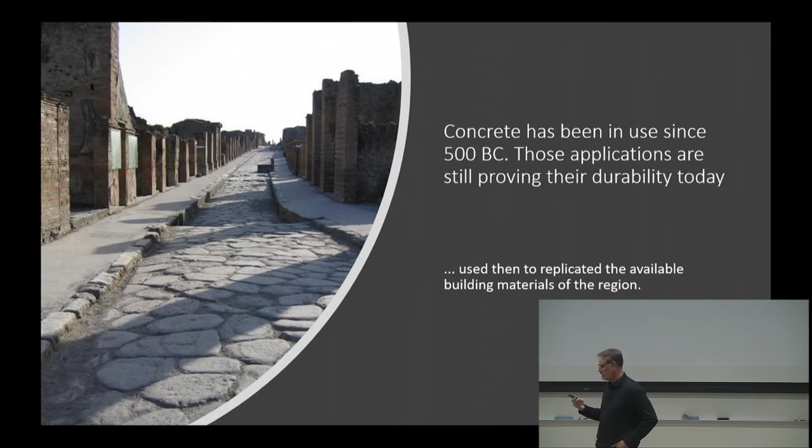Fast forwarding here to today, I publish this magazine called Concrete Decor. It covers all of the architectural and decorative aspects of concrete. There's a diversity of different applications for concrete out there, and a number of different types of people that use concrete for landscaping, pool building, general construction, and a myriad of other applications. But then when you get to a building like the museum, it too has a big concrete surface, both indoors and probably outdoors as well.

But that concrete is your canvas. And it really becomes an exciting opportunity for you guys to delineate space within this project, and you guys can have an incredible amount of fun with it.

So first off, you need to understand that concrete's been around for a while. In fact, they've been using concrete as a finish for a long, long time. It may have been made a little bit different at the time, but today concrete is made with Portland cement, and it proves to be a very durable surface as well. In fact, you can even make it better.

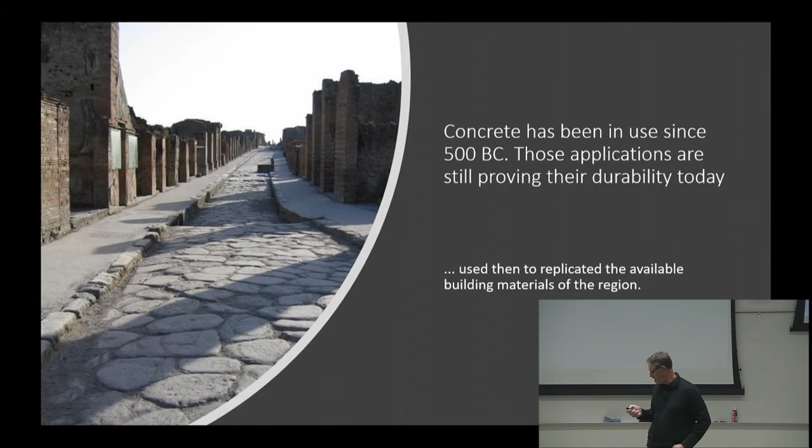So concrete has this ability to create a time and a place for people. Just like this classroom, we could have a bright yellow floor, and it would really wow you when you walked into this space. It also has its subtleties and blends very well with the walls and the types of chairs and the fabric on those chairs and a little bit of wood finish in this room. But it's all very complementing, so it works in a very subtle way in this space for you guys.

What concrete also has the ability to do for you guys is create an incredible entrance, a great foyer. Before you step into this classroom, you are walking into a space that is conditioning your mind, your creative thinking. It's really getting you excited about where you are and where you're about to be.

So concrete, in Las Vegas of all places, a place I just came home from, is probably the expose of all things decorative in concrete. So just for instance, with a building such as the Stratosphere, the entrance to that building includes concrete that's been stamped. It's been colored in a red to kind of mirror the Red Rock Canyon that is outlying to the Vegas area. But all of these things kind of touch on the geography and the things that get you kind of into a new and exciting space. So concrete has this incredible ability to do that for us.

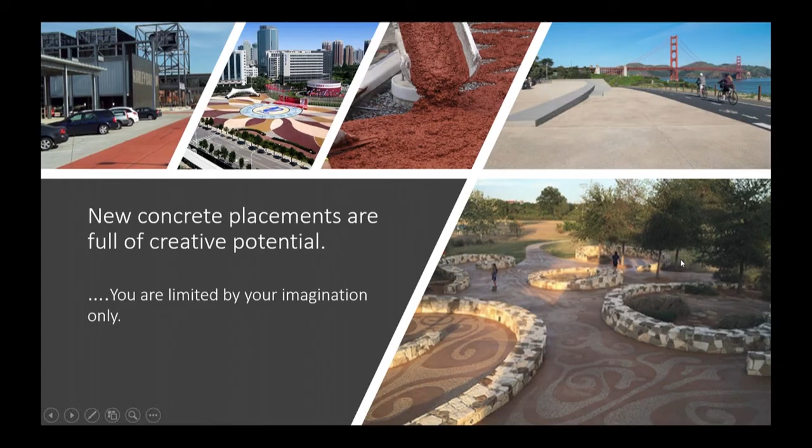So the next is about what you can do with existing concrete. This type of substrate that you're standing on in this room here can be saw cut into 3-foot squares, and you could backfill those saw cuts with a tile grout in white or black, and suddenly this whole room and the appearance of this space changes dramatically, but it's because you're doing something with the existing concrete surface.

There are a number of products out there for overlaying or putting down a topping on concrete that is stampable, that makes it look like natural stone, or it can be a self-leveling product that is hiding imperfections, bonding extremely well to the substrate, and giving you a completely new canvas to work on. A surface that will accept color just like the concrete does, but with more control over color as well.

Oh, there we go again.

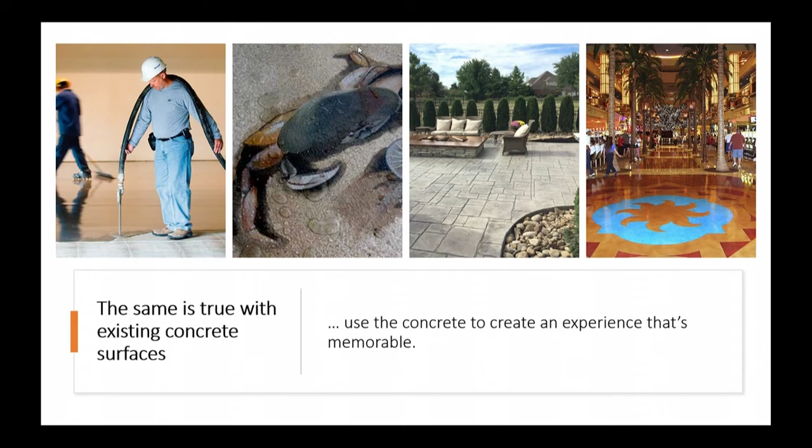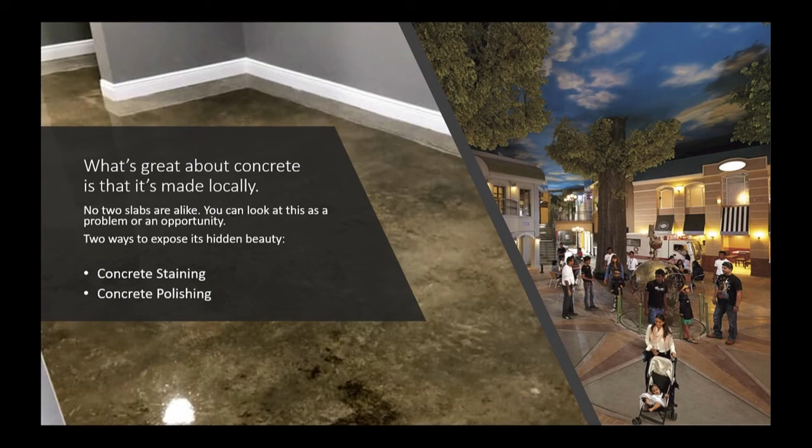What's really important to know about concrete is that even though it's the most used building material in the world, it contributes about 10% of all output of carbon. It's just not going to go away. The world's got to live with the fact that this building material is the most durable, the longest lasting, most sustainable building material on the face of Earth. So we're going to look for ways to protect concrete and the production of that material, while also looking for ways to improve our footprint as well.

There's a lot of substitutes that go into concrete that can replace some of the cement that is manufactured elsewhere. But for the most part, you're working with a product that was made locally, using natural resources, aggregate that was mined in local quarries to make that slab. Not too much of that product was imported from other places. So unlike another type of manufactured product that has to be manufactured, shipped to a supply store, then shipped to the plant or project site so the project can be finished, concrete is a material that is standing there ready to be finished for you.

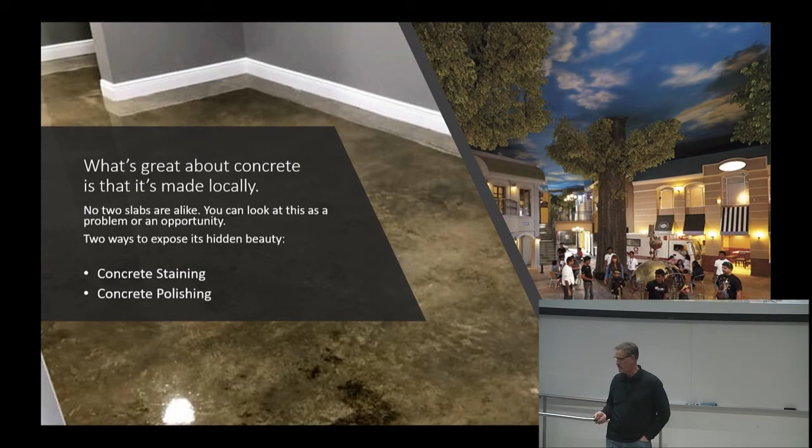So when I was looking at this project, I thought about a couple of different types of materials that would probably go well with this building. I'm just going to let you guys think about those things as you put your projects together.

Stains are one of them, and there are three different types of stains used in concrete. One is reactive stains. They react with the lime in concrete, and that creates a reaction. Every time it's going to be in an earth tone, so it's going to be subtle colors - browns, light greens, reds, terracottas - but always in that earth tone.

Acrylic stains are going to be a more vibrant color. You can get pastels and a number of different, real popping colors on concrete. Reactive stains react with the concrete; acrylics stay on top of the concrete. So you have to address those types of products in different ways.

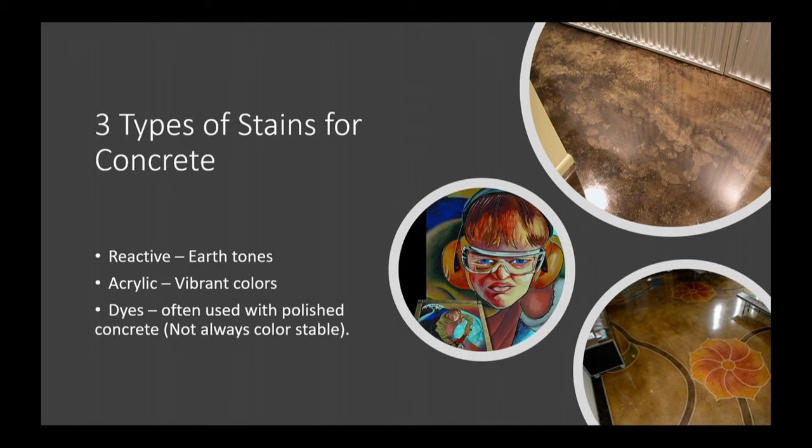Dyes become the other coloring option, but that really takes me to the next recommendation, which is polished concrete - and that's exactly what you're looking at on your floors in this room here. You're not just looking at a concrete slab that has been honed or brought up to a level of gloss that you might find in some other type of establishment where they want better light refractivity, a higher gloss level. So the polished concrete is a good thing because it also improves the strength of the concrete.

Chemicals that are used, like silicates or magnesium, actually react with the lime in concrete and create a harder surface. So you have more abrasion resistance, higher PSI - all of these things add to the durability of that slab. It's already been sitting there since 1940. So it's a process that leads to a very low maintenance surface as well.

That's all that needs to be done in here is somebody coming in after hours and putting a mop or a dust mop on the floor and cleaning up. Maybe every 6 months they come in and do something else to the carpet or to this concrete floor in your classroom.

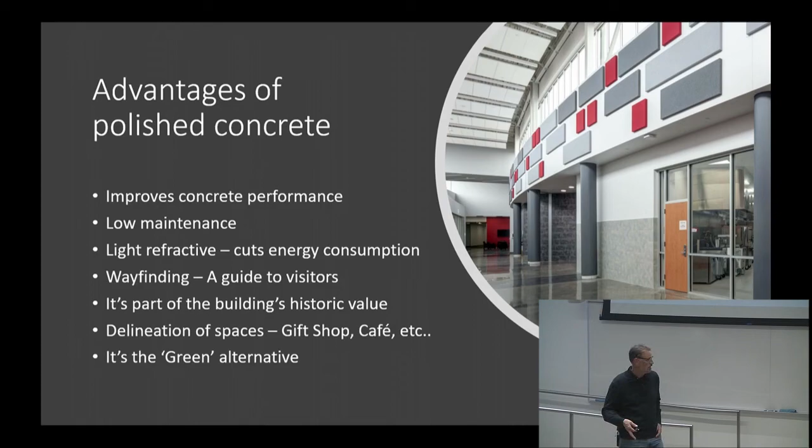Light refractivity is a big plus in this category too, where you're talking about 300,000 square feet of surface area inside this building covered by a roof, a rather dark overhead area. It could have a tendency to use a lot of electricity to get that area up to a level where people can actually see where they're walking. So light refractivity cuts energy consumption.

Concrete, the way you guys plan to use it, can create this wonderful wayfinding path for the visitors. You can do that with color, and with a myriad of different types of applications, some of which you'll see as we walk forward here.

Keeping in mind that as part of the historic value of the building, it is a piece of that building's history that you are really bringing out and exposing for everybody to see. It's going to be a beautiful process along that path there. It's the green alternative as well - again, you don't have to specify other types of building materials. You can use the concrete.

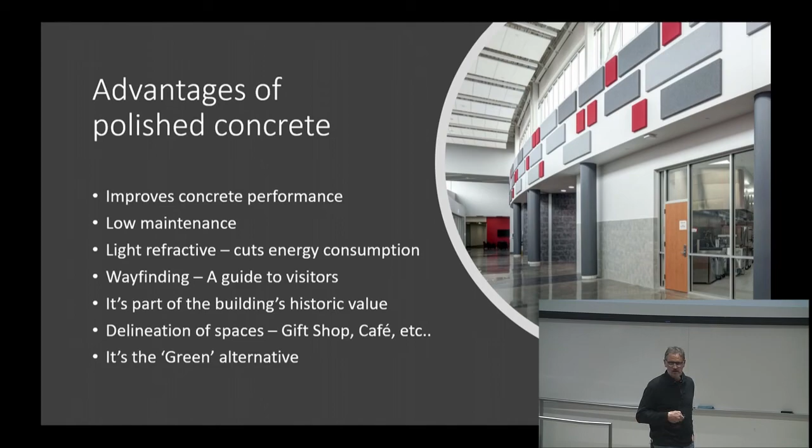Another idea I had, with all this concrete, is that the exterior can be a great way for you guys to incorporate sponsors. Help the city find ways to source funding from corporations across the state of Oregon and across the country, and provide them an indelible, permanent mark in this building's concrete.

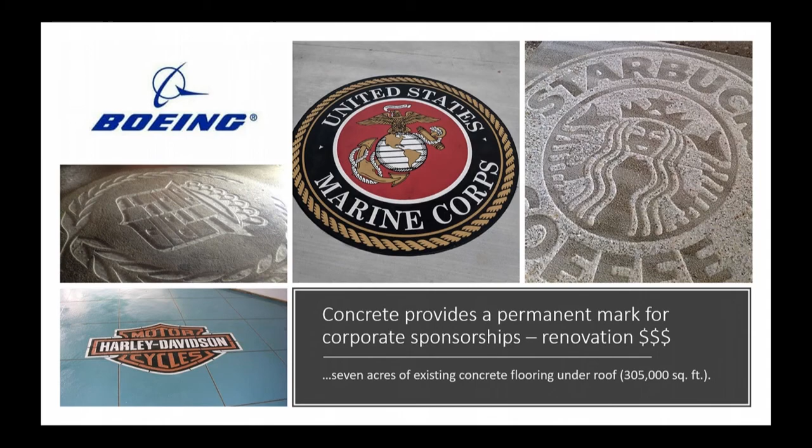So these are just some other ways that concrete can be engraved, but also where colors and stencils can be used to leave something that's going to be very permanent for these people. You guys have probably already thought about some of that.

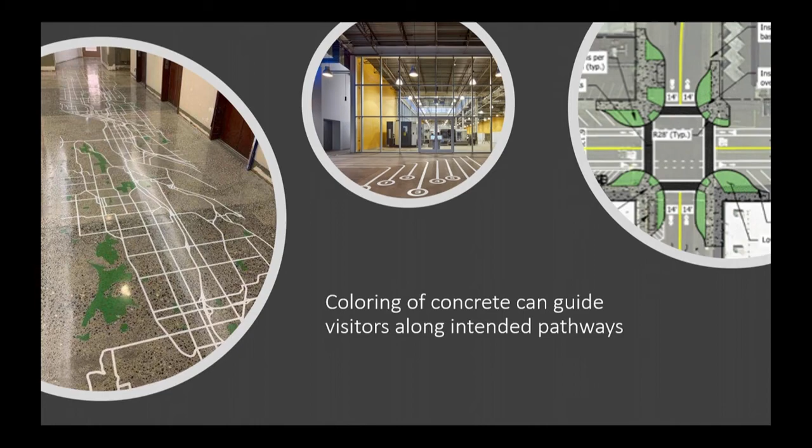I heard something about a zip line, and I had these kind of thoughts when I was talking to Chuck initially about this project, but really, that's not a bad idea. It's a pretty exciting option as well, because when you're talking about a 200-foot high ceiling, you have this ability to get up and over everything that's down below. In fact, you could use this type of perspective to help people see things from the air, just as if you were in a blimp yourself.

So those are just some ideas that I wanted to throw out there to stimulate your thinking. But you can see here how polished concrete in a large space really enhances the life of the space too. People are suddenly able to see the underside of an airplane, and they get this really enamored feeling about where they are and what they're doing.

So again, concrete has this ability to pretty much take you or your guest wherever you would like to go. So it's a design thing that you guys have to decide on, and this is where, again, how you use that space, and where polished concrete creates this space that, again, is going to be low maintenance and easier on energy consumption.

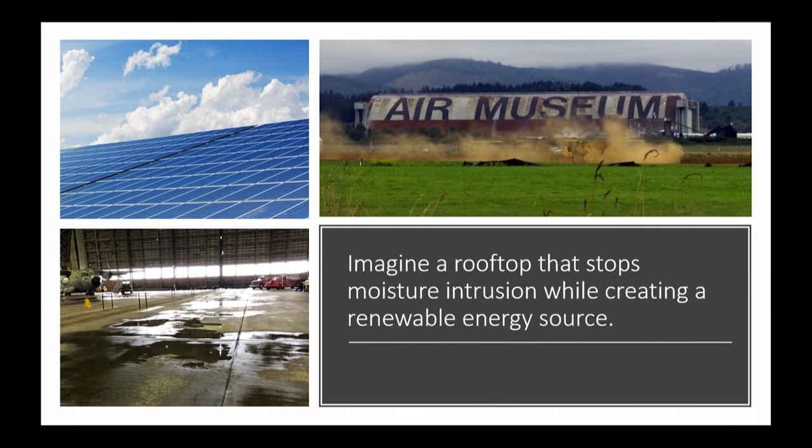That means that the utility is run by a board of directors that are elected by the public. So they have a responsibility. They run that PUD, although there's a general manager and an executive body that run the day-to-day operations. That board of directors is responsible for overseeing all of their operations.

I've been in that position myself. But the PUD has all sorts of programs, so you just have to talk to those people about the ways they see themselves being involved in your project.

My daughter is a communications director at the state capitol, so a quick phone call to her let me know that Betsy Johnson likes big projects, especially if they're inside of her district. So just a little birdie on the fence talking to you about that one there.

The Tillamook Public Utility District, the media becomes a powerful tool for you. And of course, Concrete Decor is eager to write the story on this project as well. So I'm very interested in seeing what you guys come up with, and where this project leads for the city of Tillamook.